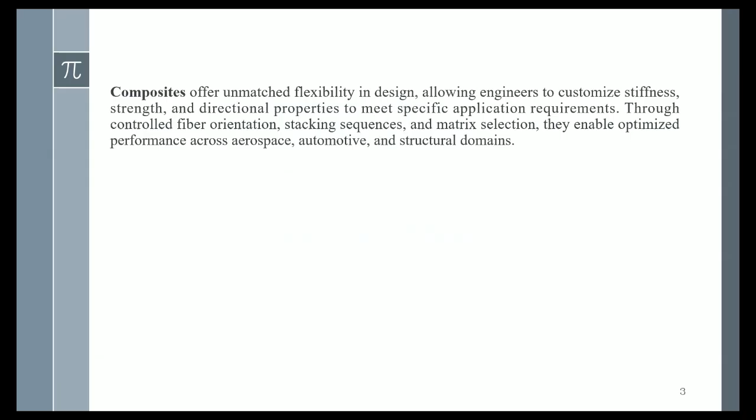This is again not working. Everything is not working. So generally, I will skip this.

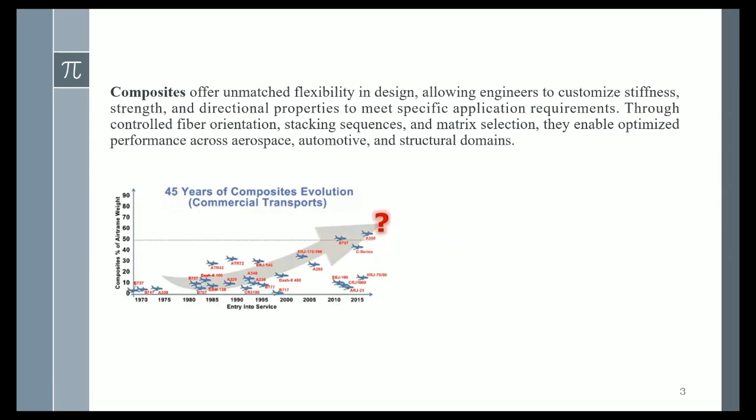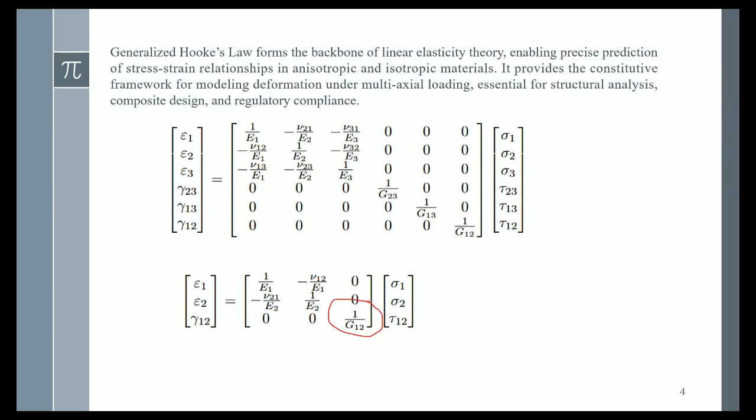It's composite growth in general expansion, as we all know, but there are still quite a lot of things that we really need to solve if we are to master the science of composites. One of the problems, whatever you do, whether it's static or dynamic, is that at one point or another you'll end up needing to find the elastic coefficients of that particular material, whether it's 3D or 2D, as composites are mostly used as thin laminates. In this discussion, we are concerned with the in-plane shear modulus, since this is the most influential one when it comes to twisting-prone applications, like in our Department of Aerospace.

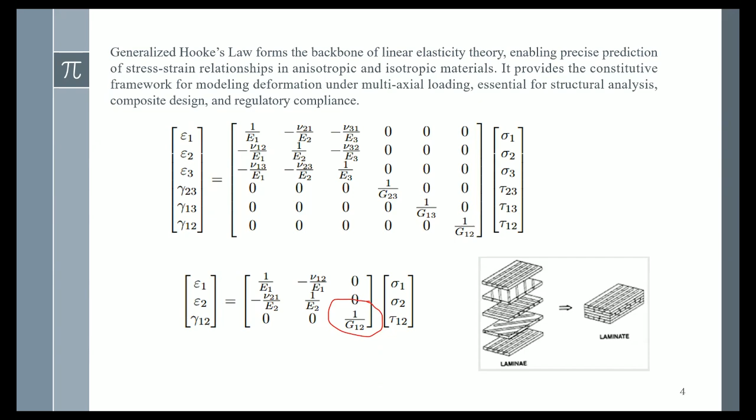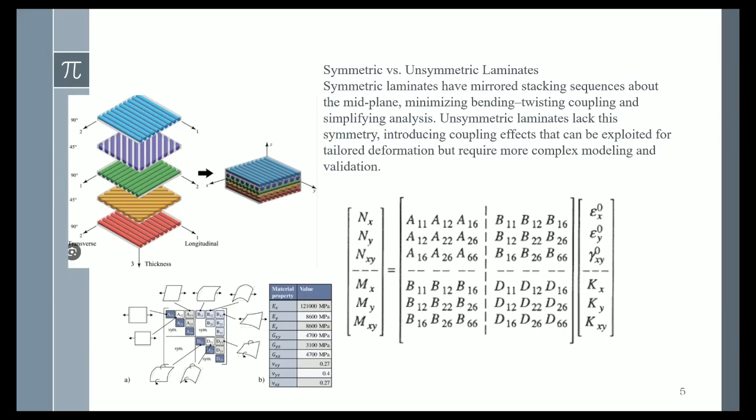We deal quite a lot with fly-worthy structures. As I said initially, we mostly concentrate on asymmetric laminates, which I generally believe are underused and theoretically hide a power that really needs to be unleashed. Why are we not using them at their full potential? Because of their modeling, and we still have no adequate theories which can fully support their development. That's mostly because in asymmetric laminates, in their stiffness, the ABD matrix as we call it, a coupling between bending and twisting exists, which is hard to predict depending on the fiber arrangements based on current theories.

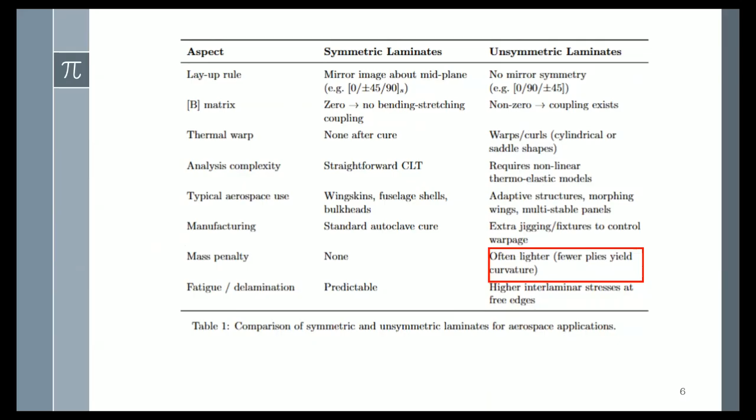As I said, we believe that if we master the science of asymmetric laminates, we can gain quite a few benefits. One of those would be lighter structures, which is highly desirable in aerospace. There are four independent elastic coefficients within a stiffness matrix according to the generalized Hooke's law for orthotropic structures, and for asymmetric laminates they are really hard to predict. At this stage, they have to be measured. So this is what we actually do.

We have tried to deploy machine learning, and I will show you the complete steps and the final results of our algorithm, to see whether based on this we can gain some experience and knowledge when working with asymmetric laminates. We combined, as in the general machine learning roadmap, analytic models, experiments, and numerical simulations in order to create the data set. In this case, the data set contained about 200,000 combinations of asymmetric laminates. At this moment, we are concerned with carbon ones, AS4, within an epoxy matrix. The second challenge, once the data set was created, was to recognize the most suitable algorithm to train the model, to test the data, and to deploy it within software. This process is not as straightforward as presented here, but rather goes back and forth.

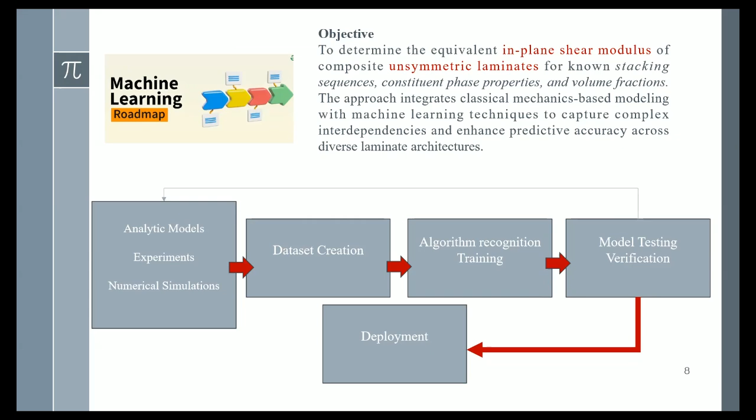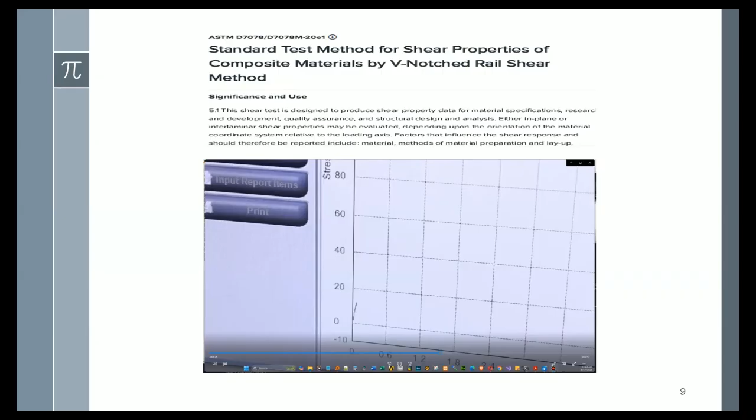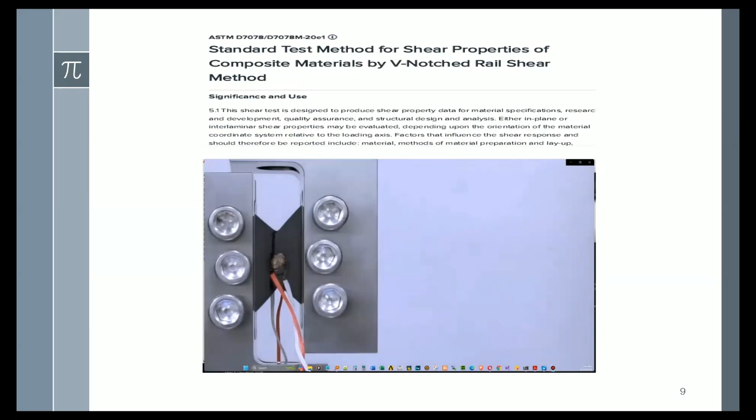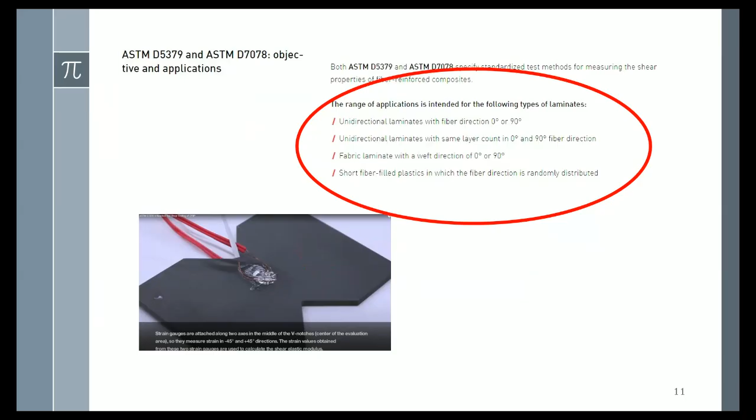You always realize there's something wrong. Since, as I said, at this stage, and I'm presenting also due to time constraints, we are most concerned about the in-plane shear. This is the current standard as it is proposed for composites, but I will tell you right away, I'm just showing you this since we simulated this test. Initially we had to modify it. The problem was that the test suggests this only works for so-called balanced laminates, which contain fiber orientations of 0 and 90. This was not satisfactory for the problem we were trying to solve, since we really needed to cover all the angles in between. So this is what we did.

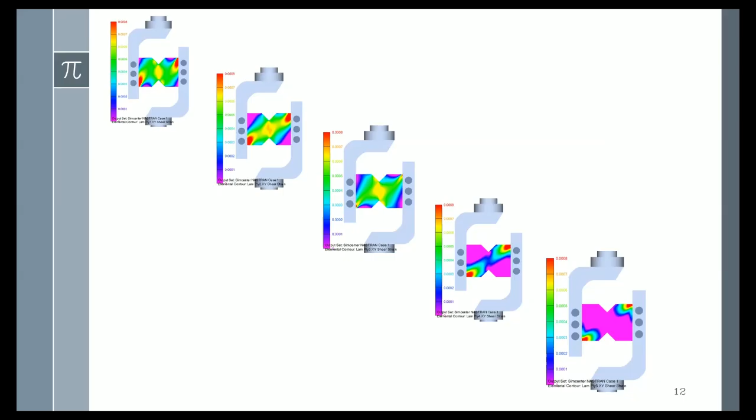The problem when working with asymmetric laminates, and why this test is not directly applicable, is that within the plies of an asymmetric laminate your strain distribution is totally different from ply to ply, and you are measuring the strain only on the first ply as per the standardized test. So this is our simulation of the standardized test. However, with the change to accommodate testing of asymmetric laminates, we are not measuring the strains, but rather the displacements. To be more specific, the rotation of the central node of our model. The central one coincides with the shear center, since our test coupon is symmetric. So this gave us an insight to simulate this.

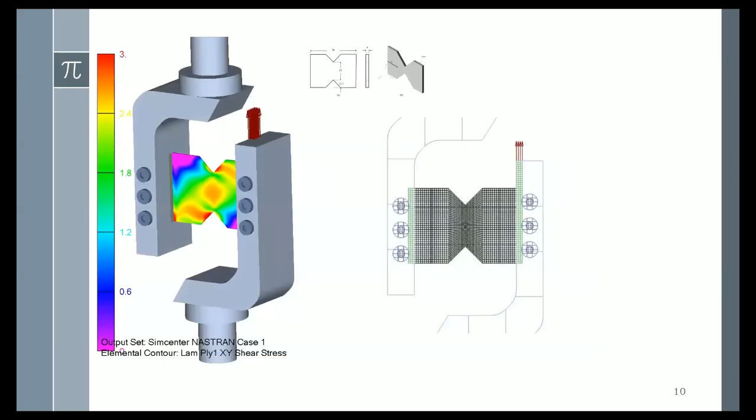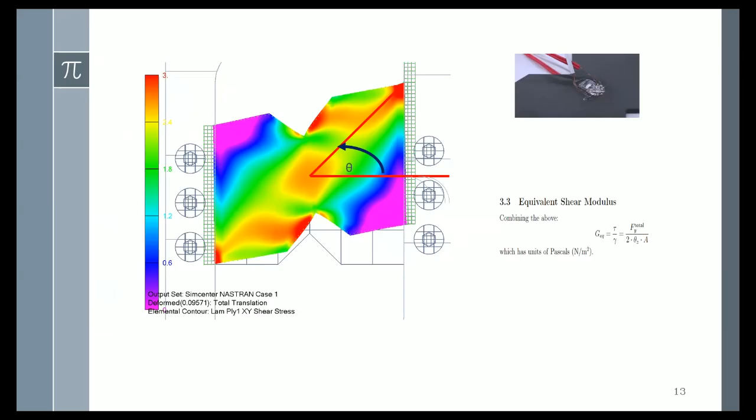To simulate this test, but with this modification, we are measuring the rotation of this particular coupon at this particular position, as I said, in the shear center, and then deploying the basic theory when it comes to shear stress with the formula. For the known force, geometry of the coupon and the rotation, we are able to determine the equivalent shear modulus. So not this, but something like that.

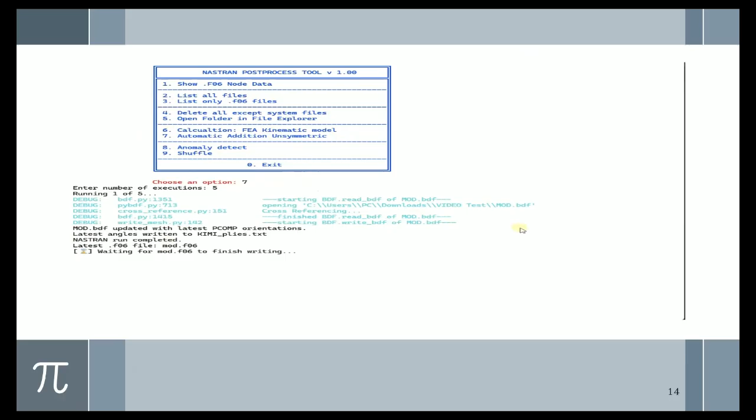So we developed this in order to gain a data set. The data set, as I said, contained quite a lot of entries, which is always the case when you're dealing with machine learning. I'm just showing this to see how our intermediate set for data set creation works, and how fast it is. It's not fast at all, but you are doing this only once, so it was not of concern. You just let it run. It randomizes the fiber orientations and calls the solver. In this case, the FE solver was Nastran, and then the data set is created.

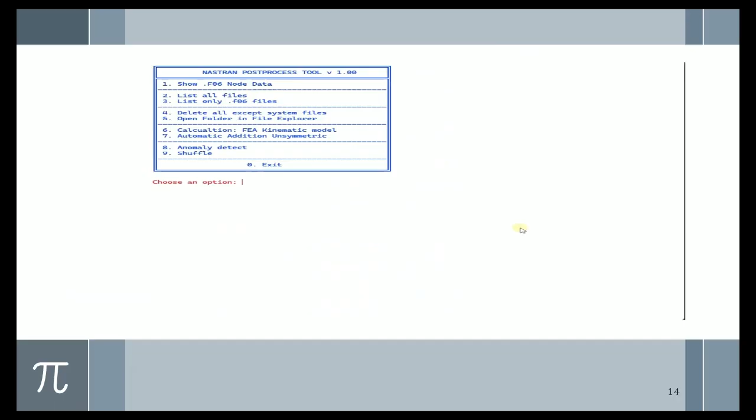And this is the schematics. On one side, what I have shown you on the top is a part of a data set. Based on our previous experiences, we were targeting to use in the development of the machine learning algorithm the regression algorithms, because they have proven to be very good in problems like value recognition, which is one of these. Also, they are known to work very well within the bounds that are given.

So this is why our symmetric data set is based on classical lamination theory, because it is much faster than the finite elements, added due to bounds, symmetric ones. So our data is coming from two sources, FE simulations and the classical lamination theory, but as I said, for the reasons to bound the future regression algorithm.

So based on this and our help routines that we have developed, the technologies that we worked on are Nastran and MATLAB, C# programming, Python programming, and something that we generally use regularly, I mean, all of us these days. Also, these funny letters here are due to problems with the fonts. We randomized our data set and we checked for the anomalies as well. Again, something that's done on a regular basis.

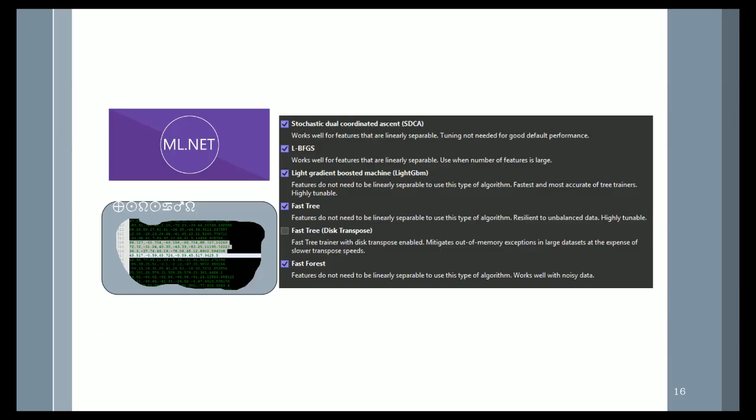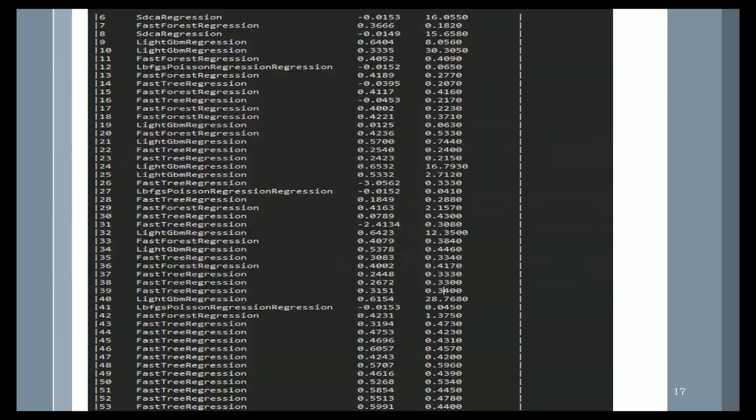So we ended here at the position that the question of the algorithm was to be answered. As I said, we targeted the regression algorithms, and from our previous experiences in our other project, we like to work in these situations with ML.NET technologies, and first to investigate what kind of regression algorithms, all listed here, would work best on our data set created as explained previously. The idea was to initially start them all and let them run for a certain period of time until, in the first pass, we recognize the one that in the shortest amount of time gives us the highest R squared. Of course, this particular one is low, but as I said, the first initial step was just to recognize which of those suggested regression models is the best candidate.

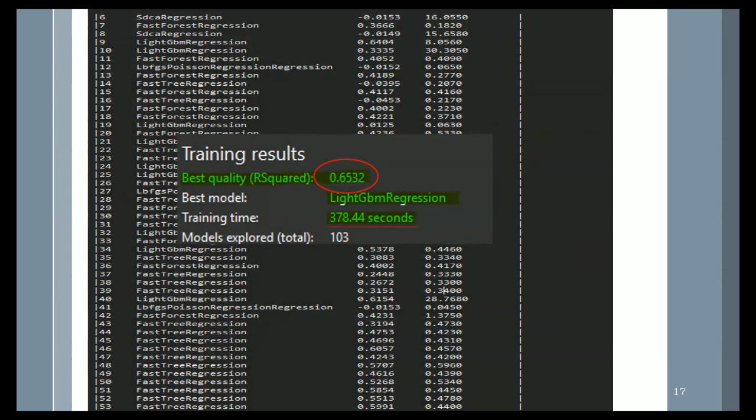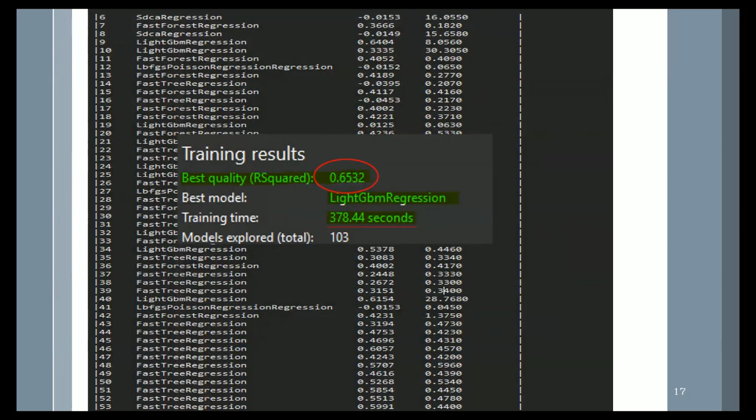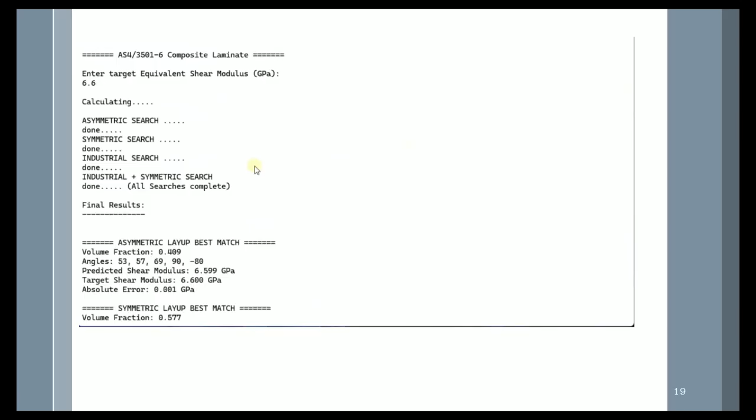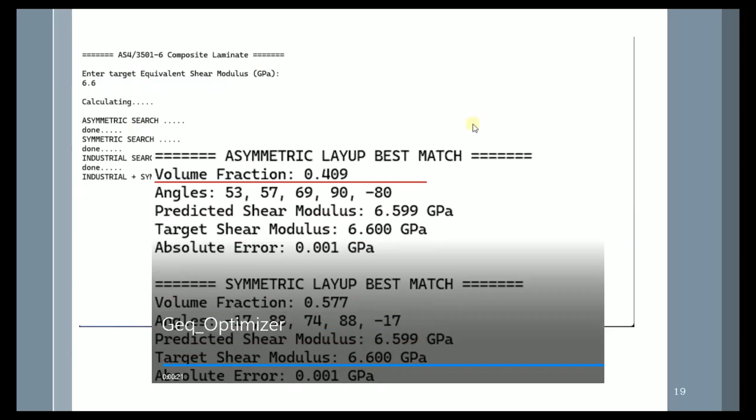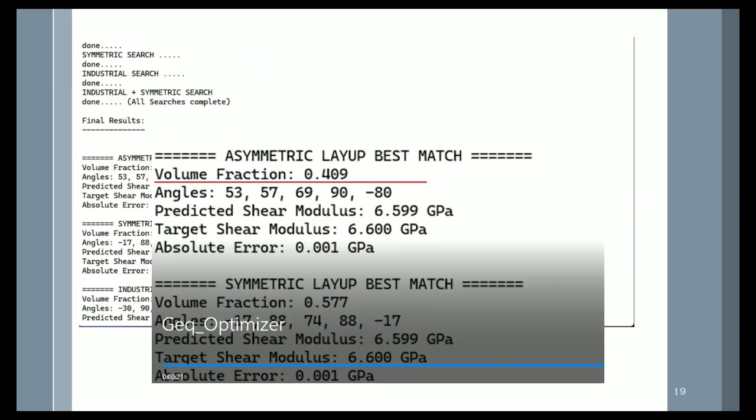So if we look at 6.6, some are values that we work with, and our inverse algorithm gave us several possible layups. Look at this one. Now let's zoom. That's the very first, the asymmetric one. You see angles of 53, 57, 69, 90, minus 80. Nobody would have guessed that except for the ML algorithm. But the key is here in the volume fraction. The volume fraction of this is 0.4. If we look at the classic symmetric layups, the volume fraction is close to 0.6. Basically, this is directly related to the mass of the system. So I think this algorithm achieved this goal.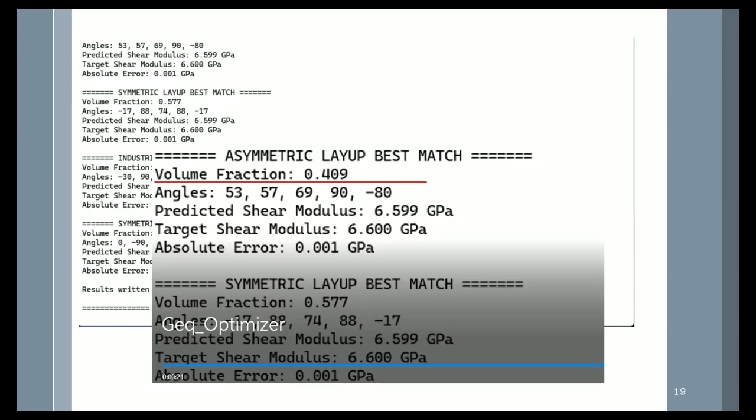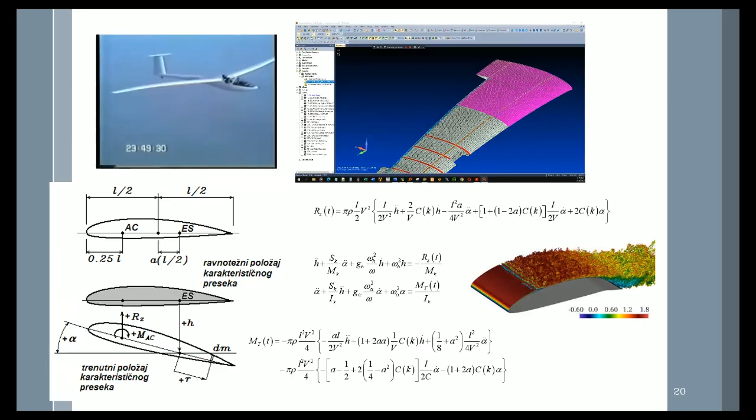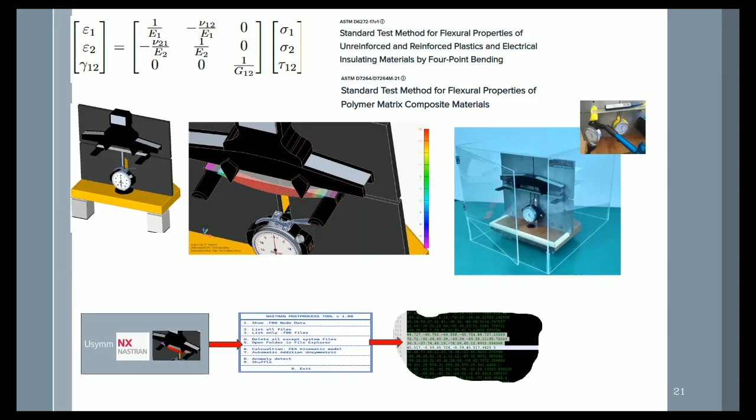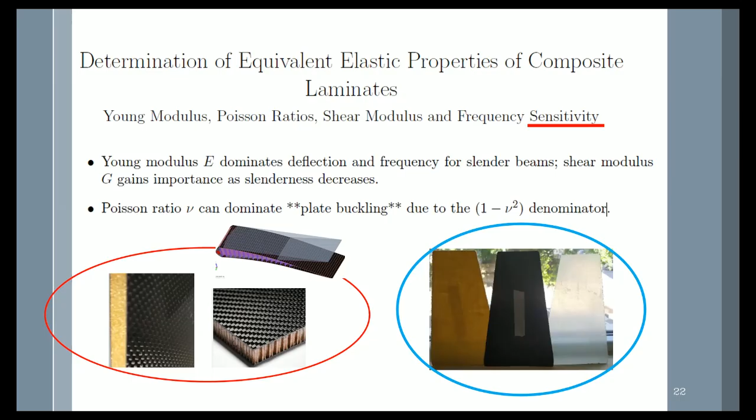And these are the problems that we are dealing with, where we will try to deploy this algorithm, mostly in plate stability in the realm of aeroelasticity. And we're going towards, and I'm finishing, completing the complete stiffness matrix for plane, thin structures. As you can see, we would need to incorporate E1, E2, and a Poisson ratio, major nu 1,2. So we are working with that, starting from simulation and tests. But now, since we've gained some experience using the shear modulus and developing the whole system, as I have shown you, we will deploy this for all other three elastic coefficients, and then progress to working with more complex structures, such as, as earlier mentioned, sandwich structures with a core and also different materials. This one, in order, the glass on the right and the Kevlar on the left, was already tested. So that's all I have for the moment. Thank you very much.